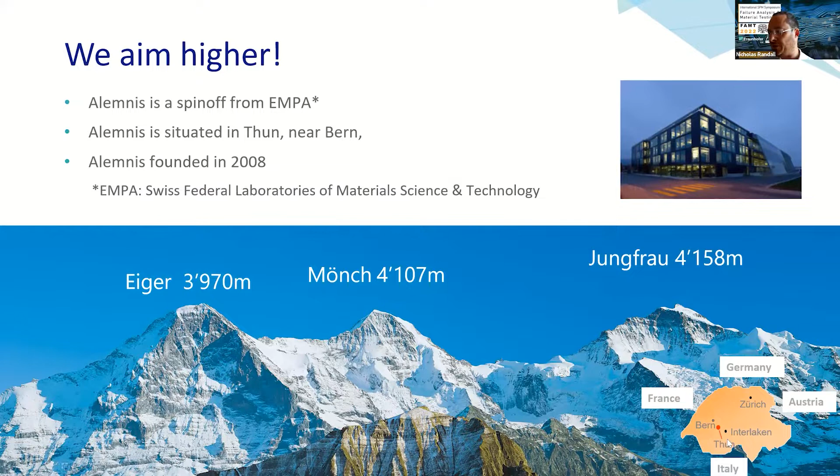Alemnis is originally a spin-off of EMPA in Thun, Switzerland. We're located just below Bern in Thun - this is the view from our office. This is a bit of the evolution of the company. We started around 2000 with the first in-situ mechanical tester that could be put into a scanning electron microscope, so that you can actually see what's happening when you're making a mechanical test.

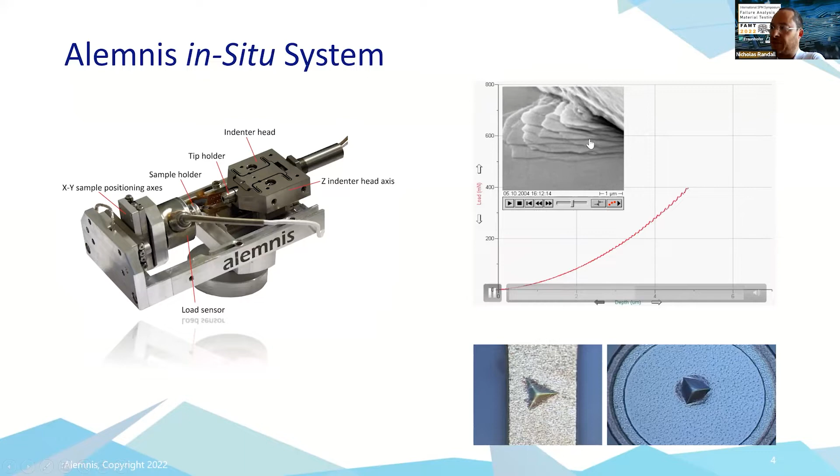So what is an in-situ test? You can see it here - this is an indentation into a bulk metallic glass. The load displacement curve doesn't necessarily tell us what's happening at the interface, whereas being able to see the test live with the SEM shows us that we actually have some slip planes here.

So the system itself is small. We have an indenter mounted on a displacement actuator here, and a sample mounted on the load cell. The sample is typically on a standard SEM stub, so it's very easy to mount - we either glue or clamp it.

This is used a lot already in typical nano indentation testing of, for example, bonding pads you can see here at the bottom, because we can locate a zone to a few nanometers precision. So we're very, very accurate in our repositioning accuracy.

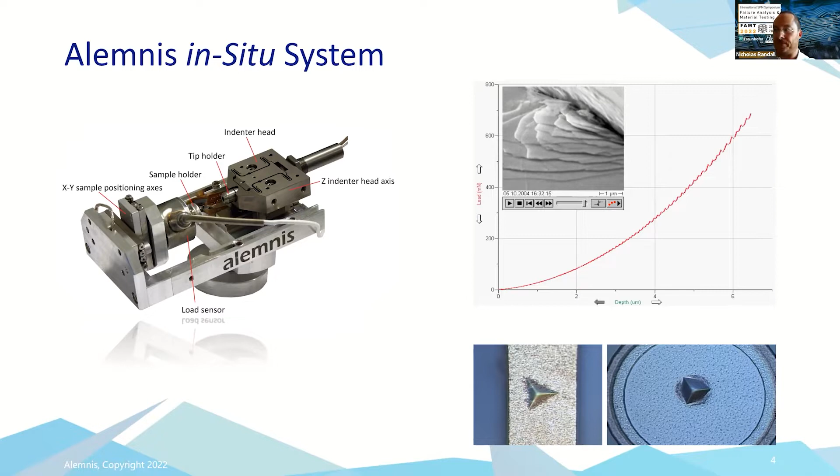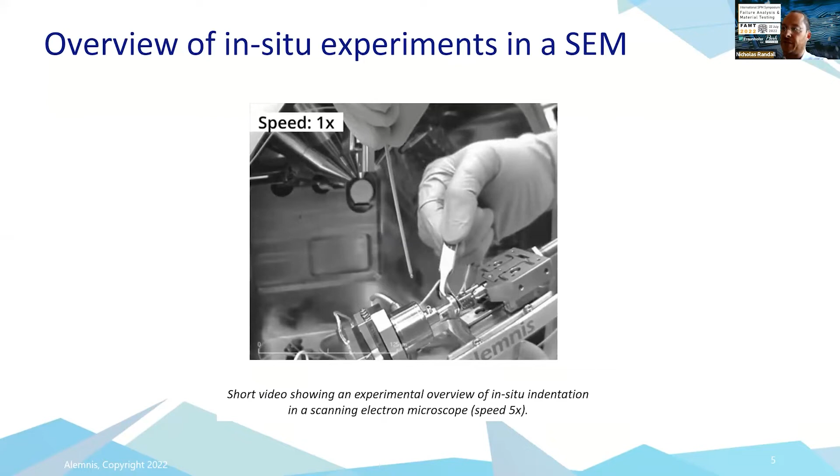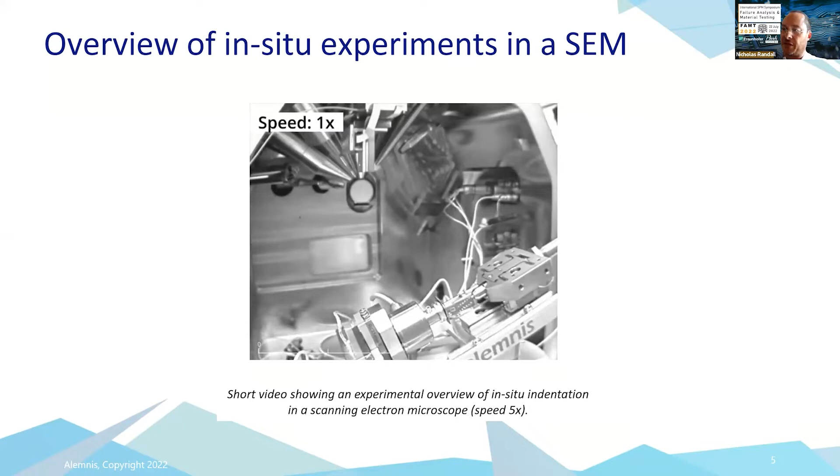Just to show you what this looks like: here's the Alemnis standard assembly mounted on the XY stage of an SEM. We're just mounting the indenter here, and then we're going to mount the sample, which is glued to an SEM stub, which you see now. Once we have sample and indenter in place, the whole assembly can then be moved under the pole piece of the SEM. Here we see just tightening of the grub screw, and then the whole assembly is moved inside the chamber. Then we shut the door, pump down a vacuum, and approach towards the pole piece.

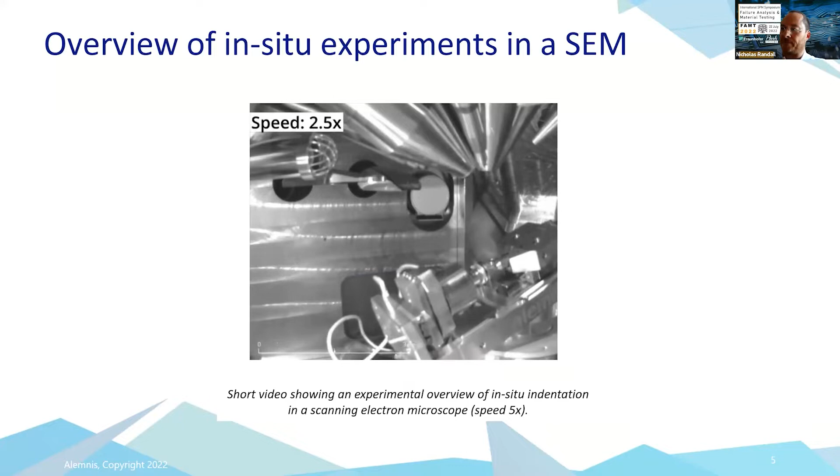Here we go. Once we're focused on the surface of the sample, we can then choose where we want to make a test. In this case, we're looking at a micropillar made by focused ion beam, a FIB'd pillar. We might want to do a single cycle stress-strain analysis to see when the pillar breaks - this is a silicon micropillar. Okay, there it goes, it breaks.

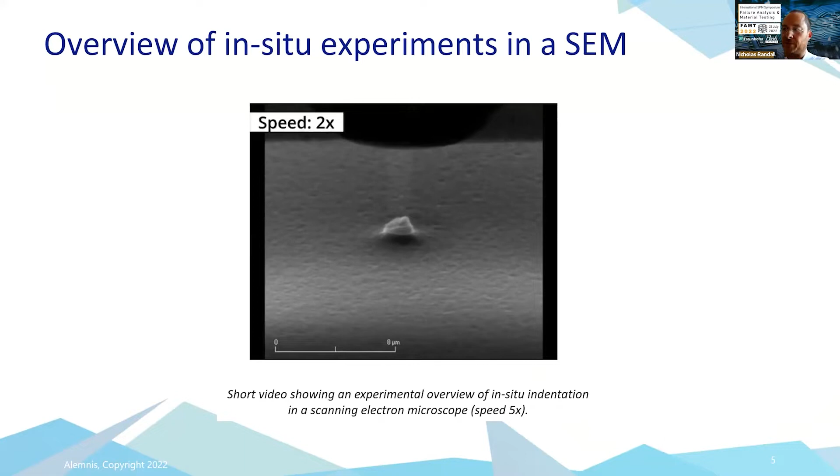Or we can program the system to do whatever we want. In this case, we're doing a fatigue test - we can do this low cycle, high cycle, we can choose the amplitude, etc. So you get an idea of how the system works.

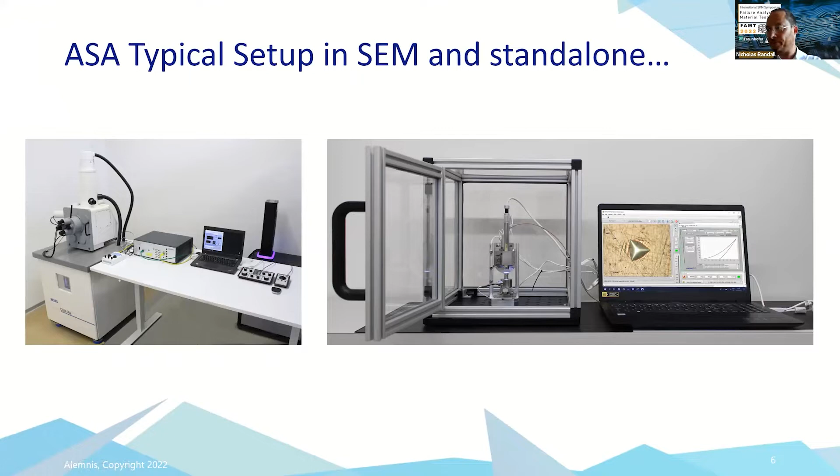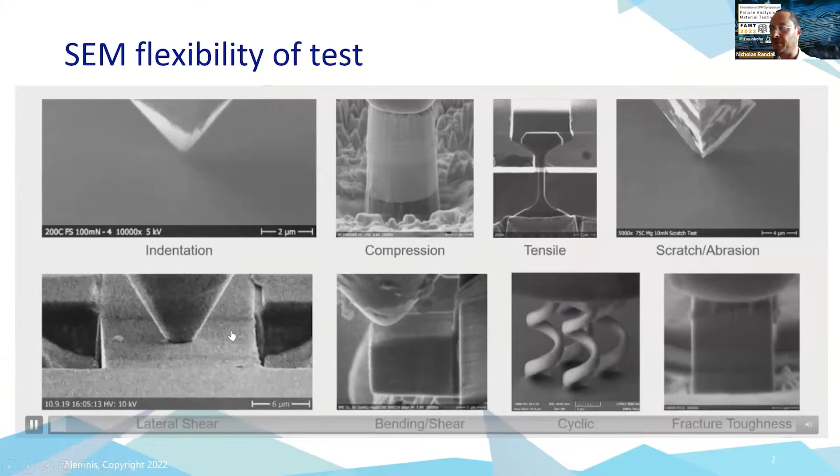One important point: different to most nano indenters, this system is a displacement-controlled machine, and this is very important for deforming large structures. You can see here, this is a 3D printed structure - if this was a load-controlled experiment, as soon as we start to crush, we're going to suddenly crush very fast and not get any data. So it's very important to have displacement control in order to have constant speed, and therefore capture the entire deformation history of the material.

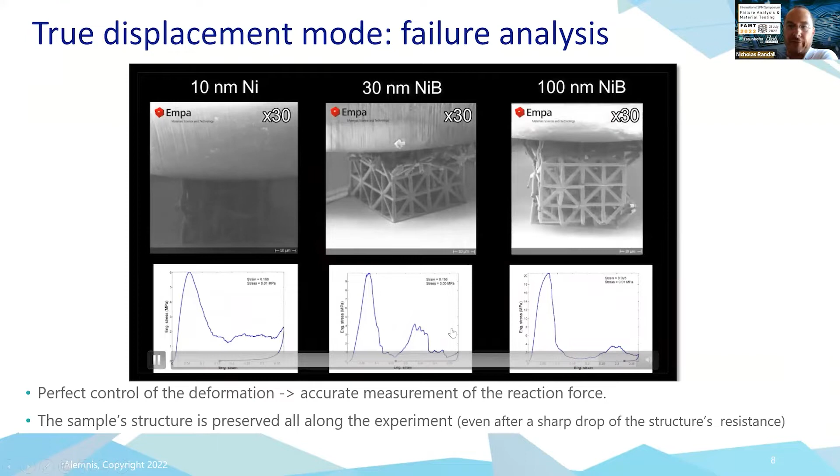So a quick overview of different speed testing, because this is quite unique. When we test at different speeds, we can look at the strain rate sensitivity of materials. At the moment, typically nanoindenters are testing in very slow regime speeds, typically 10 to the -1, -2. What's interesting is getting up to strain rates of 10 to the 4, 10 to the 5, which are very fast.

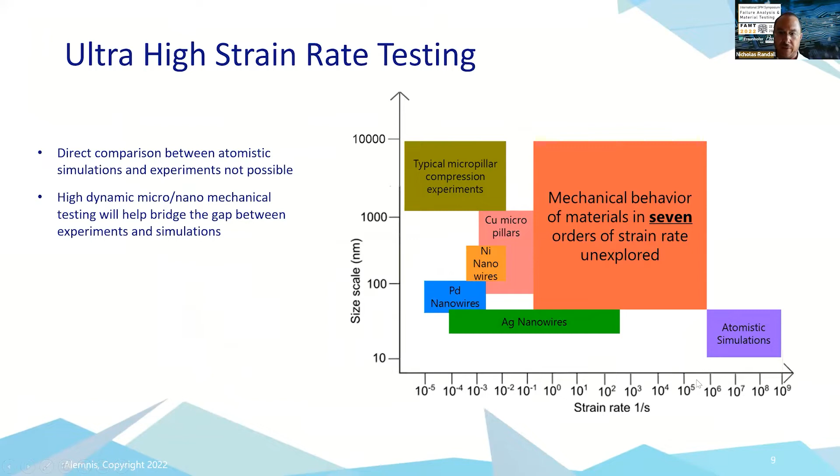We do that by being able to deform very quickly, typically using a piezo mounted here that can deform the indenter at up to 10 millimeters per second. And we do that on a very small pillar, which is a few microns. Therefore we can get up to strain rates of 10 to the 4, so 10,000 per second, which is the speed almost of a bullet hitting something. So it's ballistic, and this allows us to map strain rates over many orders of magnitude.

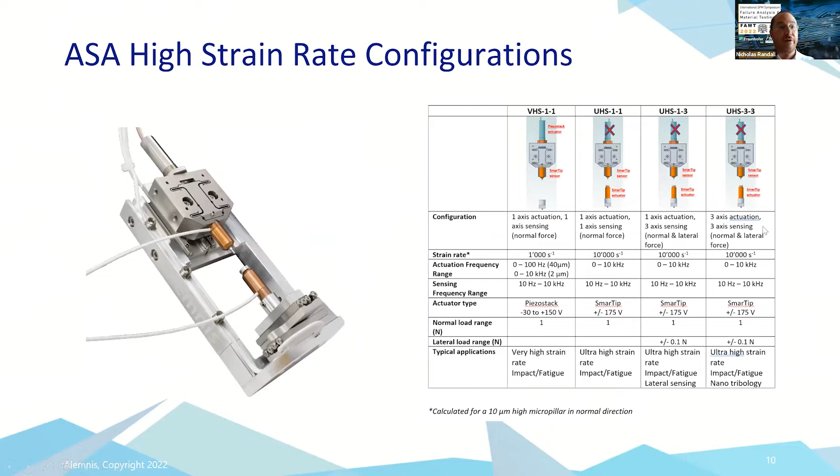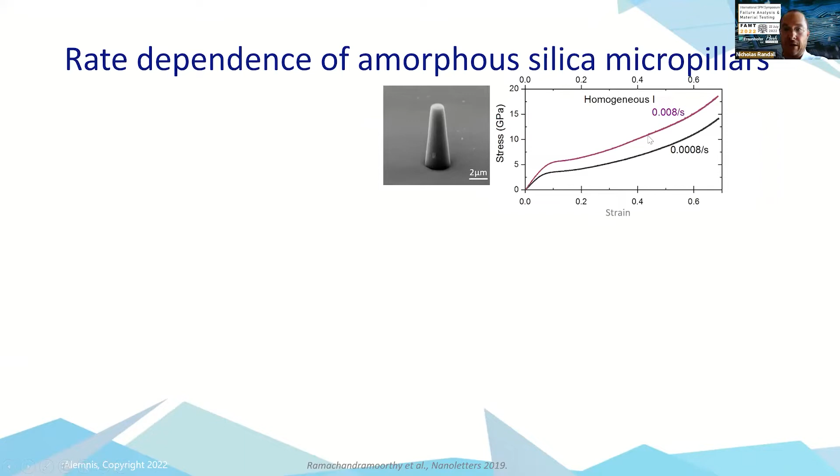Just to show you why that's useful, this is a fused silica pillar. If we deform this pillar very slowly, it's glass, we get a ductile result. At 0.0008 per second and 0.008 per second, we've got very ductile deformation, which is normal. If you deform glass very slowly, it deforms in a plastic way. If we go to the next order of magnitude, 0.07 per second, you can see now that we're failing the pillar and we've got some serration.

So we're actually seeing the ductile to brittle transition of the glass. If we go to the next order of magnitude, 0.7, now we're very brittle, and we see that in the data. We break more quickly, and there's very little ductility. If we go to the next order of magnitude, 6 per second, now we're still brittle. This is the most brittle state, and there's no ductility at all, pretty much.

So we might assume that if we go faster, we might become even more brittle, because if you hit a piece of glass with a hammer, it smashes, you don't get any ductility coming back. But at the small scale, we see that at 60 per second, we're still brittle, but we see some ductility coming back. So this is 60 per second, this is 850 per second, and this is 1,400 per second. So just on this slide, we've got 8 orders of magnitude of strain rate on the same material.

And that really is new today, being able to look at the strain rate sensitivity, especially in semiconductor materials that might be subjected to high strains in service.

So we can also couple that with environmental control. External to the SEM, we do liquid testing, we do humidity control. We can also do radioactive control and high and low temperature.

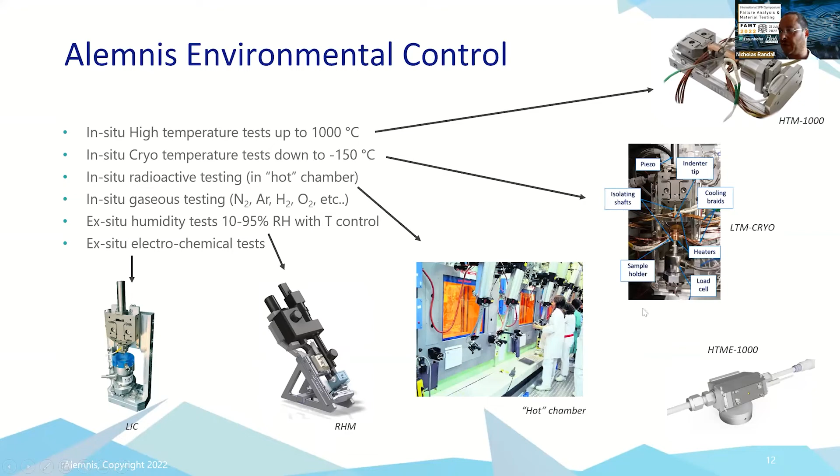So just to show you quickly a high temperature stage, here we're heating the sample and cooling it, and we're heating and cooling the indenter separately. We bring them together so that we have a stable thermal contact.

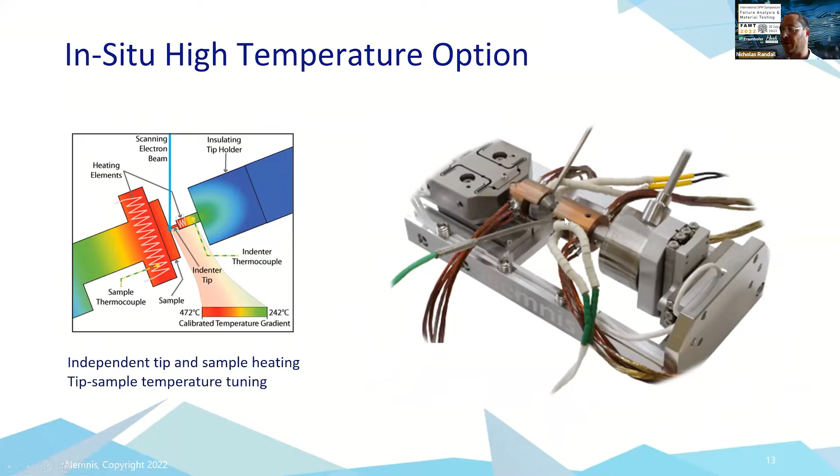And just an example from semiconductor, here we have silicon micropillars being tested at 500 degrees C. Now, we assume that silicon is a very brittle material, but when we deform it at high temperature, we see it's actually pretty soft and ductile. You can see it's a very slow test, 0.001 per second.

These are all done with different strain rate jumps. So here we're still testing because it's a very slow test. Let's go to the next one, 0.01. You can see here, ductile deformation of the silicon pillar. You can see necking occurring, but we don't actually fail the silicon. We just deform it in a ductile way.

So let's let that one run, go to the next one. 0.1, this is the ductile to brittle transition speed. We see that very clearly. And then as we go faster, we've got 1 per second, we've got 10 per second. Now we're very brittle. We're just seeing the before and after because we're moving very, very fast. So you can see that silicon has very different properties depending on the speed of deformation.

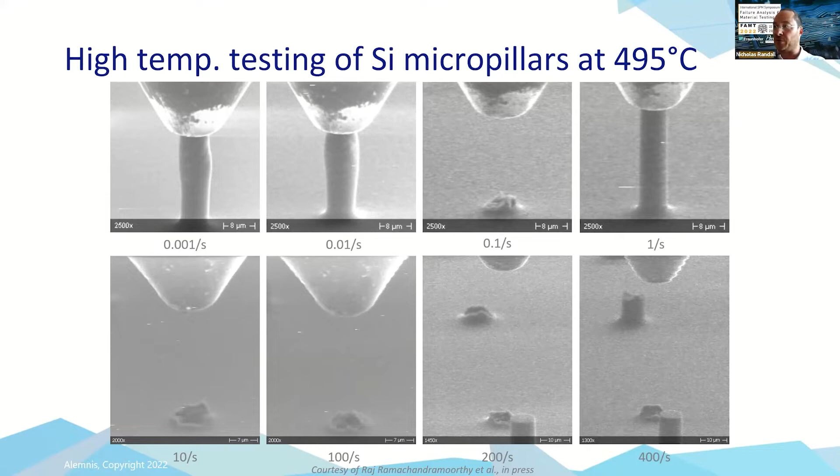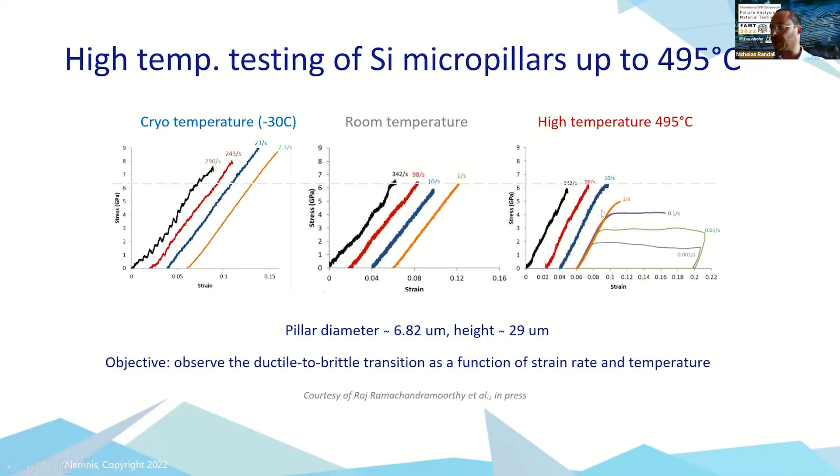And of course, that's very linked to the temperature of operation as well. Here you can just see a summary of that. So on these silicon pillars, we did testing from cryo temperatures, so very low, -30, up to 500. And you see this ductile to brittle transition very nicely on the stress strain curve.

Another way we can use the system is for rapid impact. So for shock testing, here we've actually got tests on a coating up to 100,000 hits with a flat punch, and at 2 temperatures, room temperature and 500. So we can see how the material reacts to repeated impact on the surface.

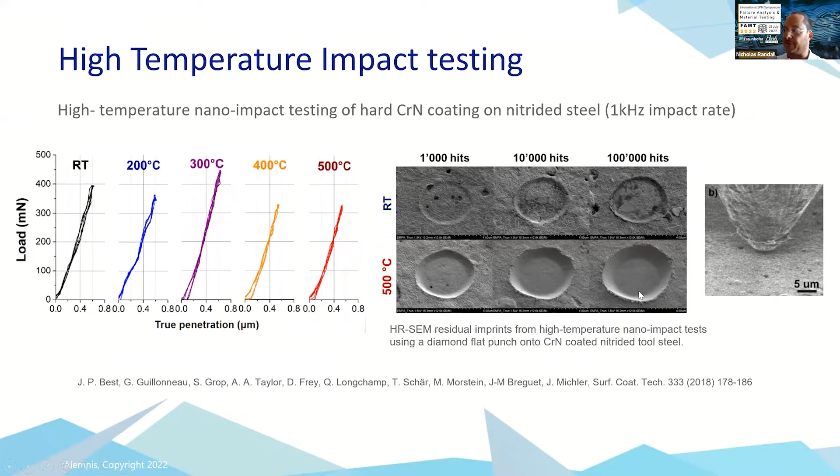This is how we do cryo, so low temperature. We're actually cooling the system by pumping liquid nitrogen into the SEM chamber. And here we've got a fused silica pillar being tested with a multi-cycle at minus 120 degrees C.

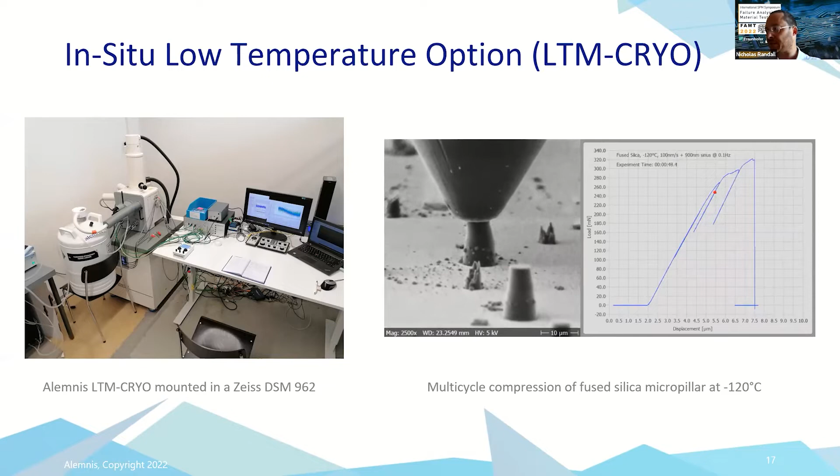Another recent innovation is high-speed mapping, the ability to make large arrays of nanoindentations over a defined surface and actually see what's going on. We can do that because we have very fast electronics for the strain rate. You can see a typical fast map being performed here with a Berkovich indenter.

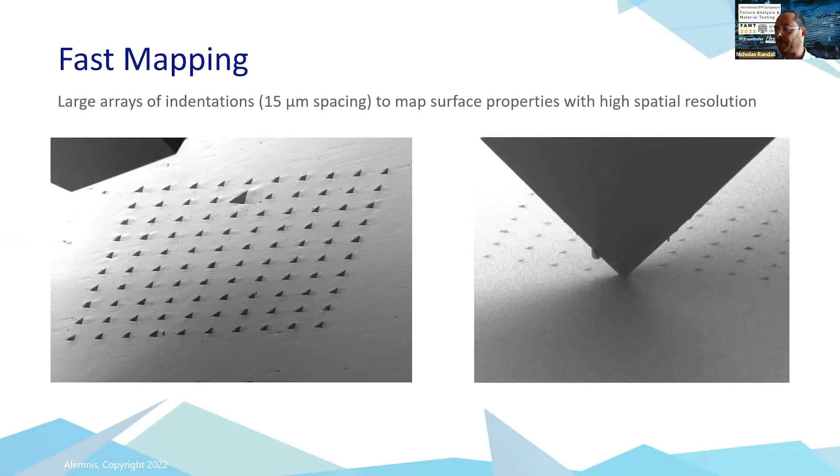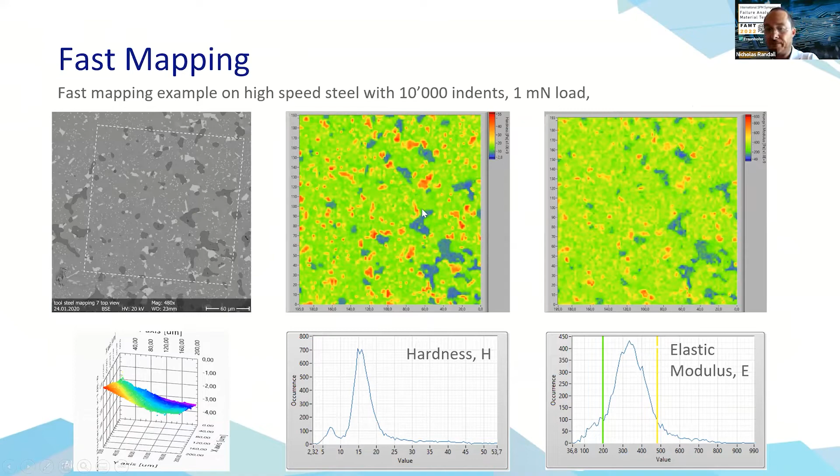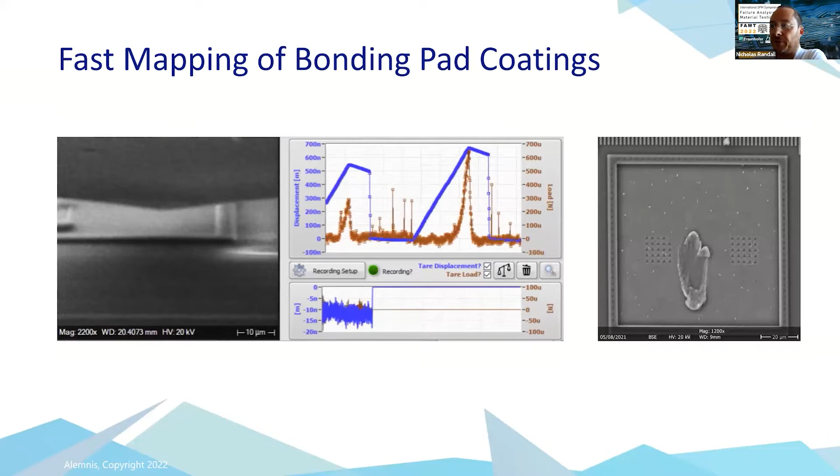In the case of semiconductor, we're often interested in making fast maps to check coating properties. This is a bonding pad coating, and we're doing small, fast arrays of maps in different areas on the bonding pad to understand the integrity of the aluminium coating deposited on the pad. Of course, we've got to be very localized because we don't want to test where there's a scrub mark.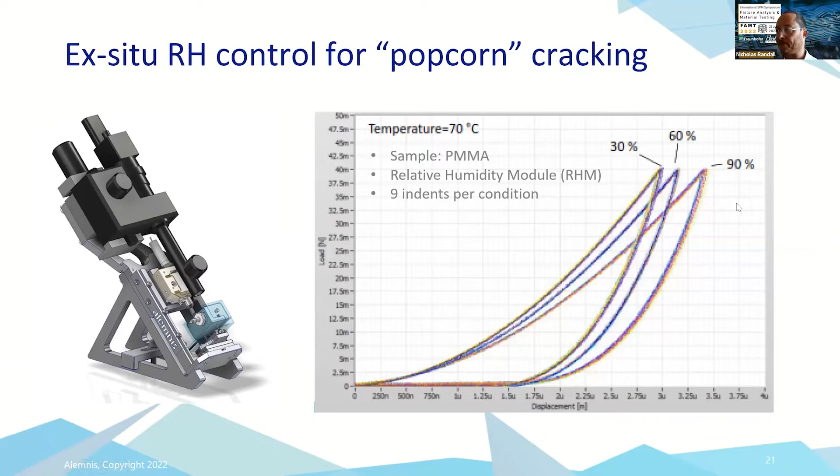We can also put the system in a modified frame for beamlines, so we can do tests in synchrotron beamlines or in tomography units. We feel this is a way forward where we could test mechanical properties and measure the 3D tomographic image. This is a system placed in an RX Solutions CT scanner.

This is a polymer foam. We're compressing it from above, and while we compress it, we're rotating and building the 360-degree image of that foam structure. This could also be very interesting for looking at semicon packaging.

This is another example of tomography - compressing a particle to a predefined strain, a deformation of 100 microns, and then doing a 360 scan to look at the cracking inside. This could also be a useful technique.

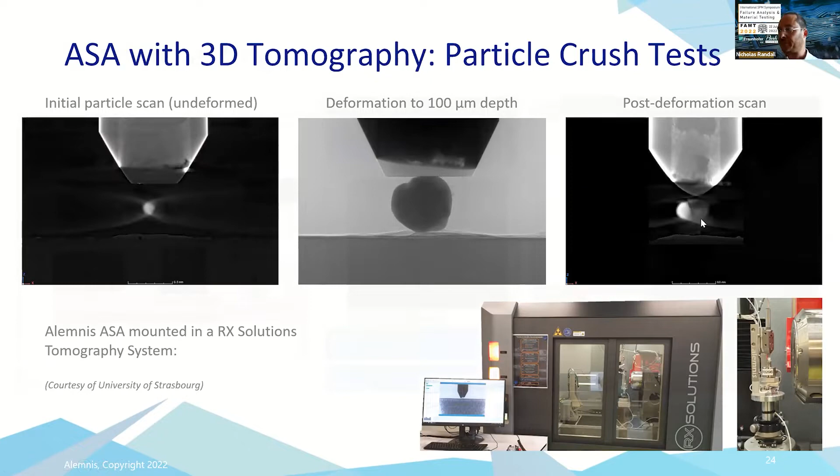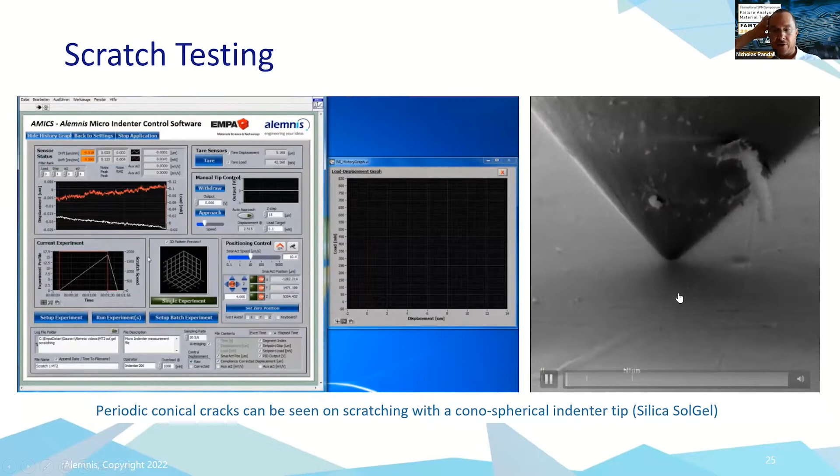Moving on to some other techniques: scratch testing is commonly used for looking at coating integrity. It's been mentioned briefly before, and it's nice to be able to see the scratch in real time. You can see the tensile cracks here being formed, and when the load is removed at the end, you can see the viscoelastic recovery of the material. It's a very nice way to understand not only scratch resistance but also viscoelastic properties, surface scratch resistance, and it can also be used in progressive load for looking at scratch adhesion to the substrate.

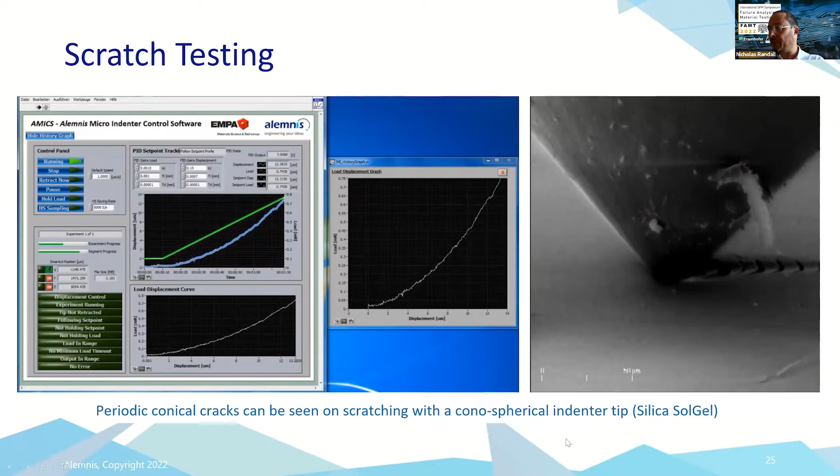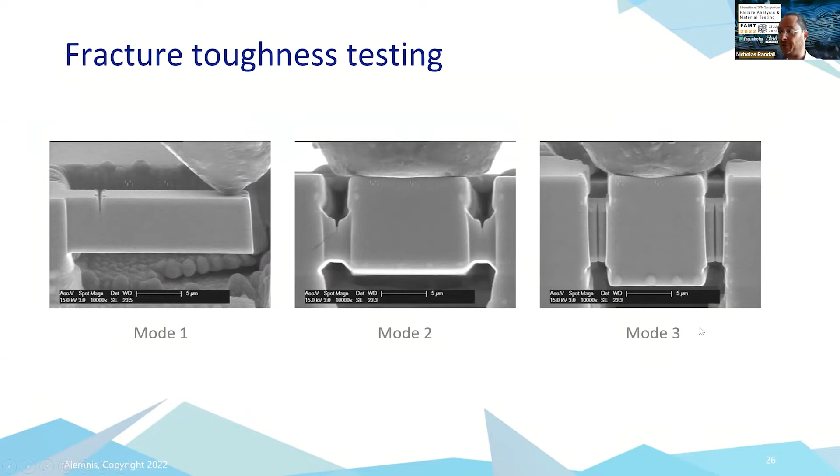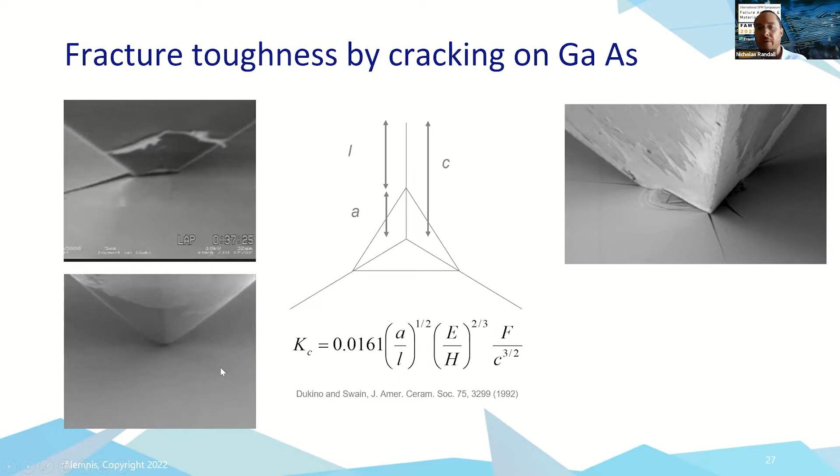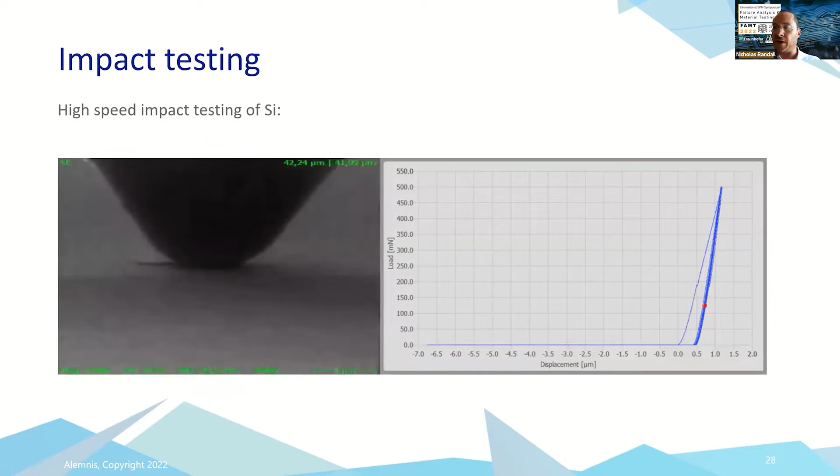This is an example of using impact for shock testing. This is an accelerometer, a capacitive accelerometer. We're basically simulating the suspended accelerometer part hitting the stoppers, repeatedly hitting the stopper and seeing how many cycles it takes to fail that material.

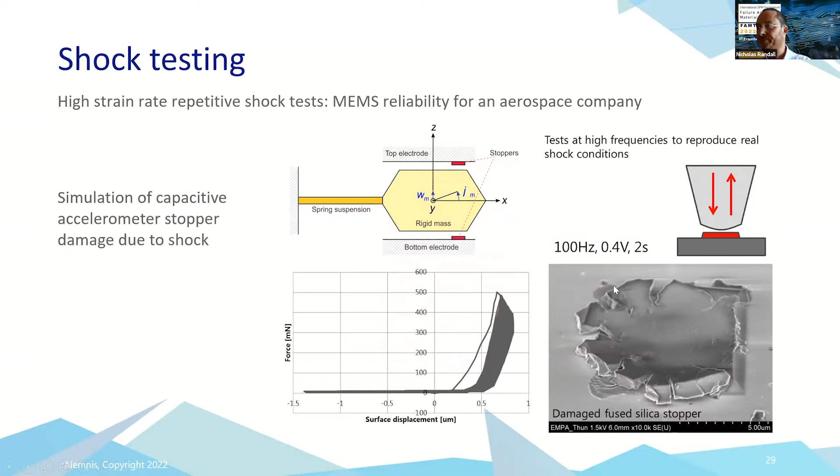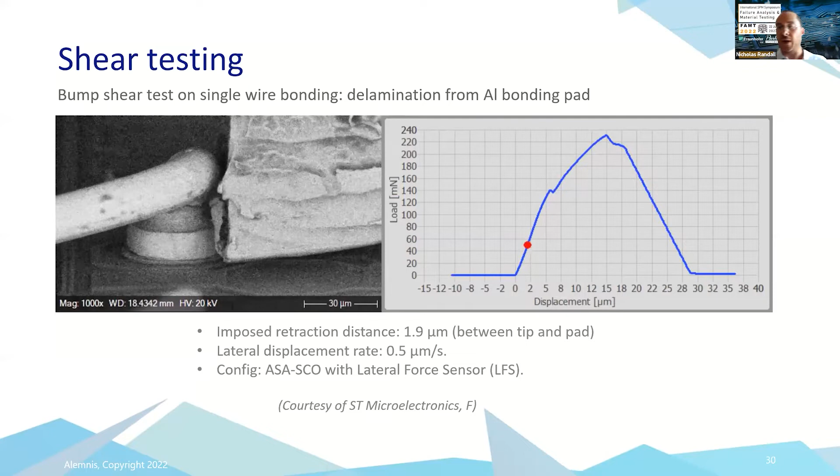This is a bump shear test. We're using the lateral force measurement of the system to rip off a single wire bond, using a special truncated indenter. It's very nice to see this in real time because we can see how the bond is failing and where exactly at the interface. We can also couple that with electrical testing at the same time.

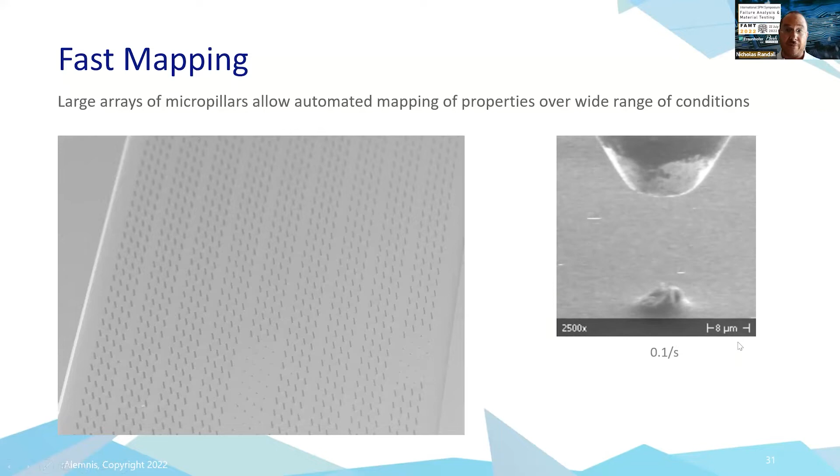One thing that's useful is combining the mapping advantage with arrays of pillars. We're able to make arrays of pillars, especially in semiconductor materials, using lithography. If we did them by focused ion beam, it would take days and days, but we can make an entire wafer of pillars in hours using lithography. This means we can program the machine to test every pillar with different parameters, quickly and in an automated way, to get a lot of data for our models.

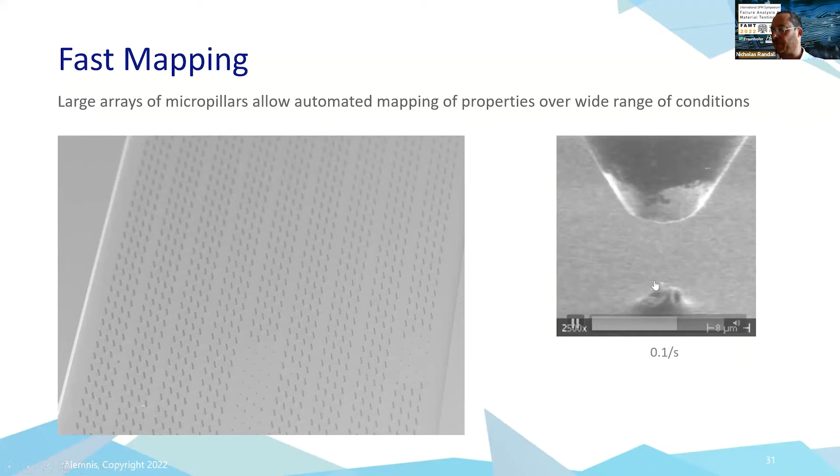So this is an array of silicon pillars. You can see one being failed on the right here. And here you can see an automated test where we're basically going to every pillar and testing each with slightly different parameters.

So you could have some pillars, for example, on different areas of your wafer around devices. And as a quality control tool, you could be testing those pillars just to be sure that the material or the coating hasn't changed in properties and you don't have a production issue.

This is also an automated platform development to be able to fast map different areas of a 4-inch wafer, which could have a whole range of devices on it. You could choose areas under the microscope and then go under the indenter head and in an automated way map different areas, different bonding pads, different devices, different packages even. That's something we're currently developing.

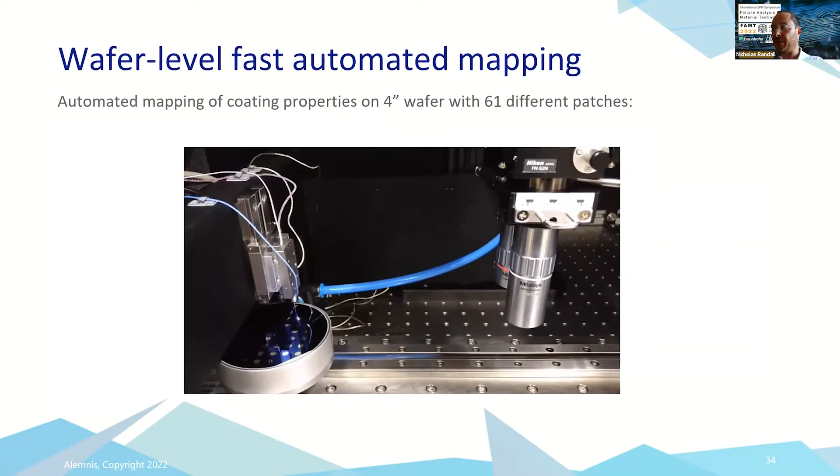One application is these capacitive accelerometers, still at the wafer level. We can drive around and choose certain devices, there's thousands on this wafer, and do a beam bend test, as you can see here. We're basically increasing the load until this beam breaks. You can see the load increase and the failure. So this is using this as a fast automated quality control tool.

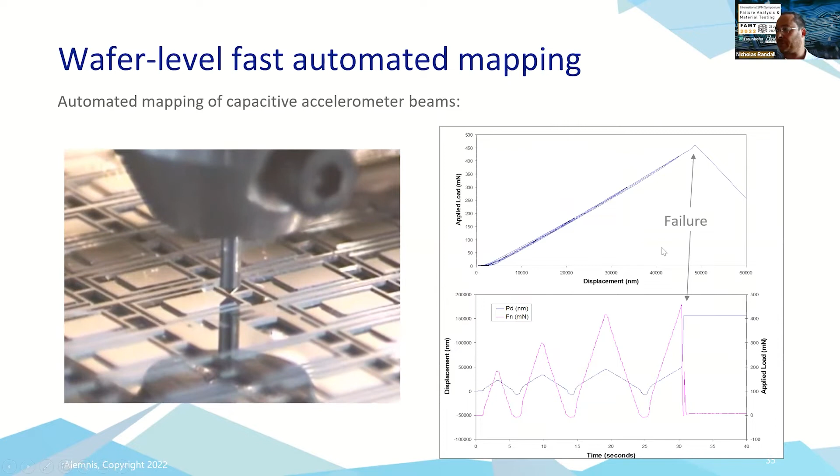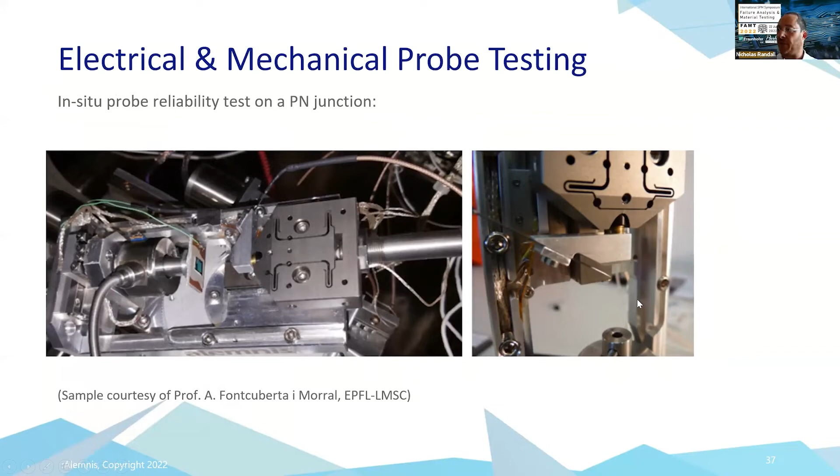We can also map through sections of bonds, looking at the coating and the bond wire, and different areas of the bond wire. This is simulating the actual probe testing by actually mounting a probe on the Alemnis system and then being able to apply that probe.

For example, here we're doing it on PN junctions and we're functionalizing the indent, the probe tip, with a closed circuit. So we can also look at the electrical properties and the load at which connection is made.

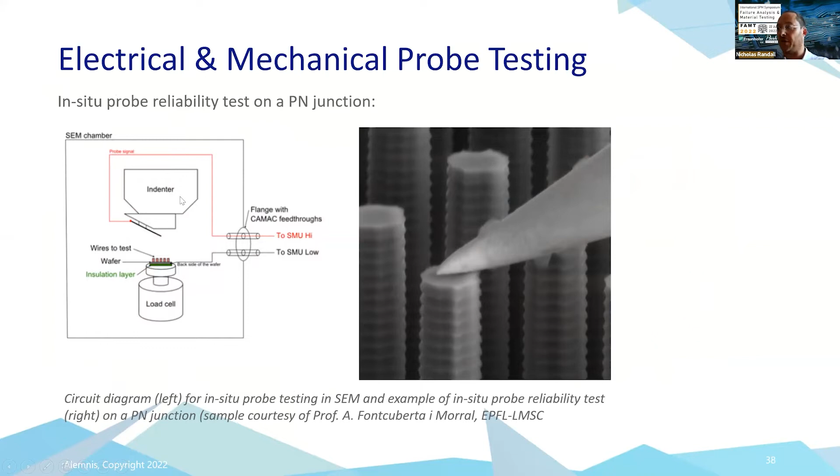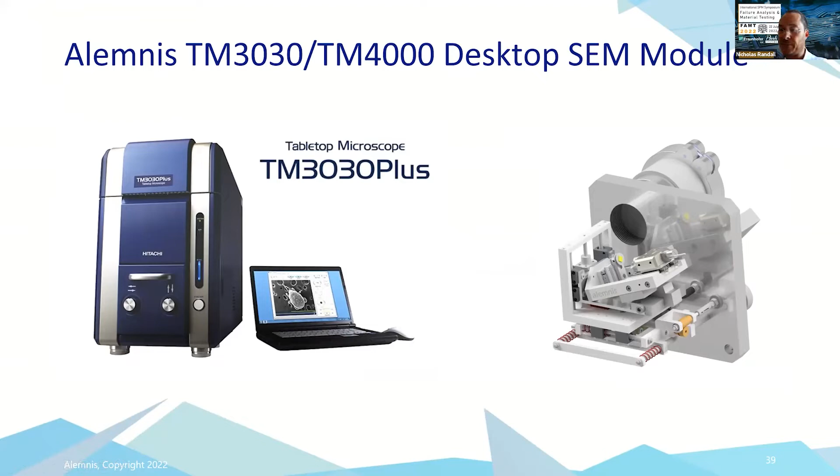So just a couple of final slides. The other thing we have developed recently is a smaller version of the Alemnis system that fits into the Hitachi desktop SEM. This may be of interest in some fabs.

We also have coupled our nano-indenter module with an AFM. We heard earlier in Silke's talk about the use of AFM in situ in an SEM. Well, with this system, you can not only look at the zone of the SEM, you can image it with the AFM, and you can make nano-indentations in specific zones of your choice.

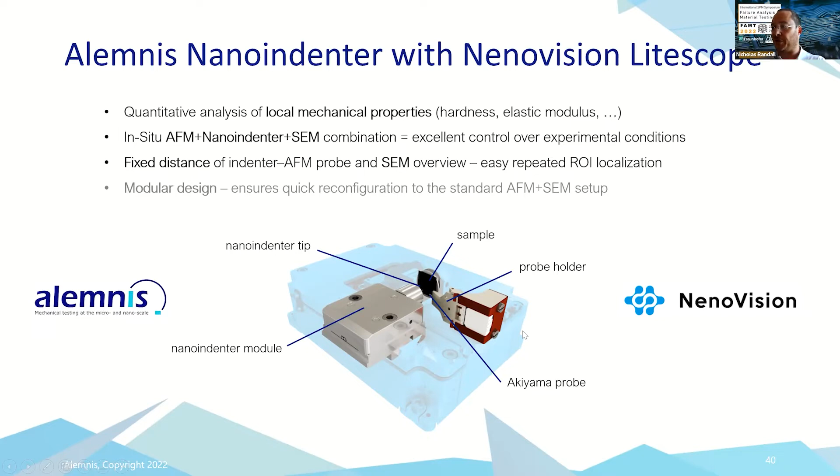So you can see here an example. This is a high-speed steel microstructure. You can see the backscatter images, the AFM image of the surface, and then we've made some indents in specific grains. So we're really moving towards correlative microscopy techniques where we combine mechanical properties, AFM topography, SEM, EDX, and try to combine all these in the same area with the same spatial resolution.

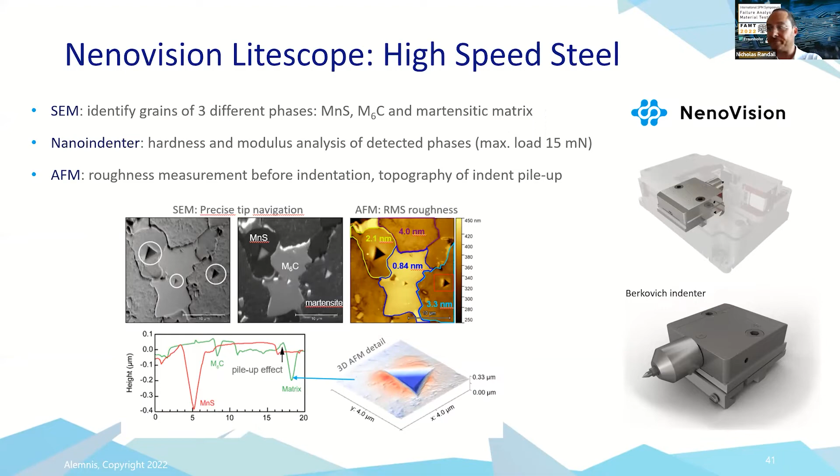Just a few conclusions. At Alemnis, we continue to push the boundaries of small scale testing. Strain rate control, I think, is very unique, as is the temperature control, high temperature and low temperature, and also being able to do very, very fast mapping. Currently, we're up to about 10 indents per second.

So the question then is, we have the instrumentation to go very fast, but does the test at that speed really make sense? If we want purely mechanical properties, then maybe 10 indents per second is a bit too fast. But if we just want to compare a surface and map it, then it can be quite useful because we get a lot of data points very quickly.

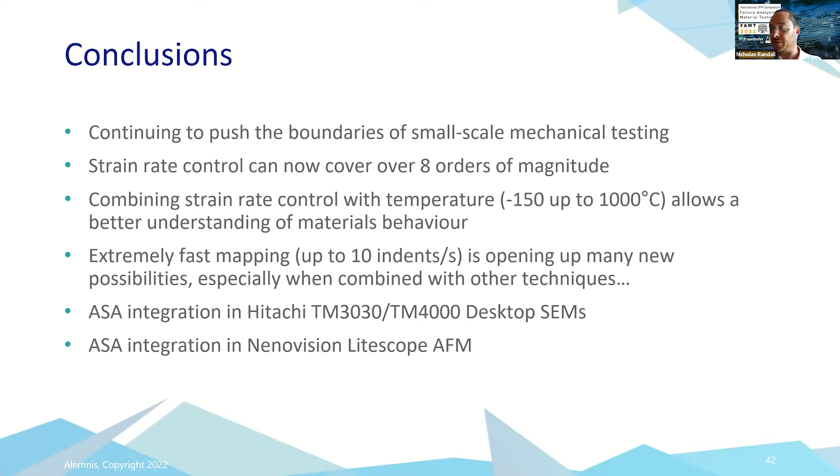And of course, integration in desktop SEM and the combination with AFM. So thanks very much. And if there's any questions, please don't hesitate to get in touch.

There's my email address. Yeah, thank you very much, Nick, for this very visually appealing presentation. It's very nice to see these live videos, and visually it's very aesthetic. So we have time for some questions, and then we'll go into the discussion panel as well, where we can have some more. So does anybody have any questions on Nick's talk?

Otherwise, I have a couple to start with, because I could see, obviously we do a lot of mechanical testing in AFM as well, but it's at a different scale. I was trying to look at the scale bars for the end radius of some of the probes you had, that look like between 5 and 10 microns. So maybe you can talk about the probes you have. Are these commercially available probes? Do you make them yourselves? What are the typical size ranges you have?

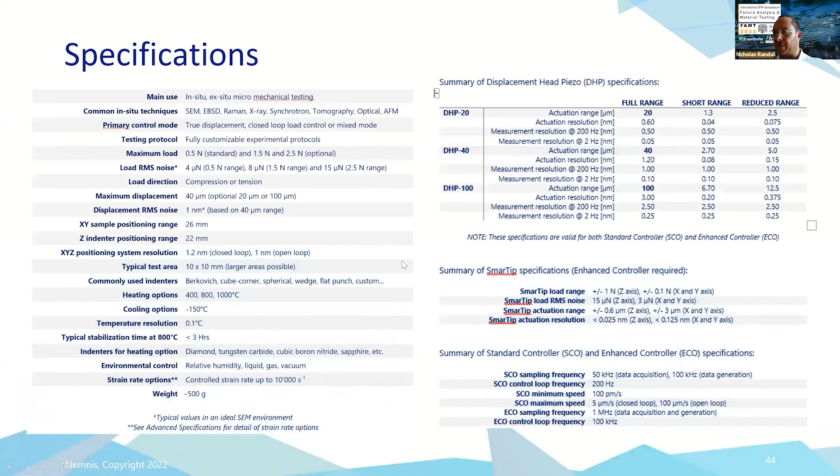Well, standard indentation, if I just go back to an indentation test. So for nano indentation, we're using a Berkovich, which is a 3-sided pyramid, as you see here. This has an angle of 137 degrees, and the best tip radius you get on a Berkovich is about 10 to 20 nanometers. So even this pyramid has a radius at the apex. So it's not the same as an AFM tip. You're never going to get the same resolution. But we need a tip area with a defined geometry so that we can calculate the contact area and therefore get mechanical properties like hardness or modulus. So it's a compromise.

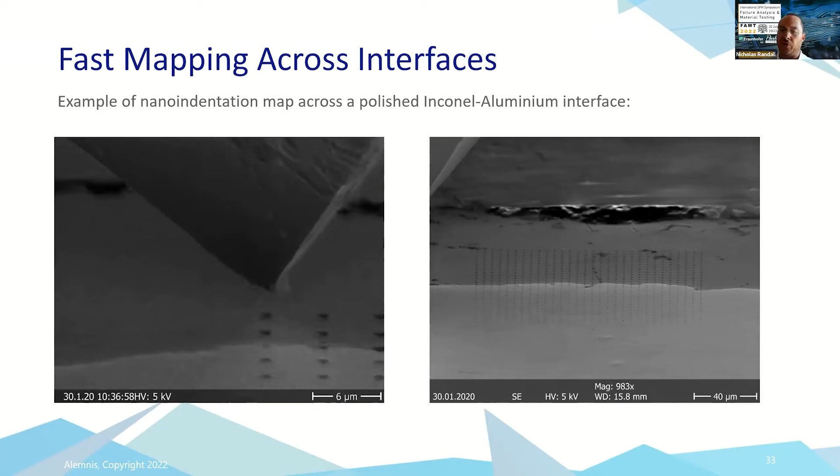Okay. And some of the other push tests, the cycling test, you're not using the pyramidal face, you're using a different type of... Yeah, so for pillar compression, we'd be using a flat punch. And the whole point of the flat punch is that on the end of this is a flat punch, so that we don't have to worry about the contact area changing. It's always the same. We basically have a flat on flat contact, so we have a fixed contact area, and so we can take that error out of the equation for stress strain. But we can basically make any shape indenter in a wide range of materials. We can make the indenters conducting, non-conducting, doped. And that's why we also developed the combination of AFM, so that we'd have the advantage of AFM imaging with the mechanical properties dedicated test. Because with AFM, of course, you can measure mechanical properties, but it's difficult to know the exact tip area shape in order to get the mechanical property in a quantitative way.

Okay. And I have one other question. If I'm not mistaken, you said the displacement that you're doing in Z here is done by piezos. What is the range of displacement that you can have? So we have three ranges, 20, 40, and 100 microns. You've got to have a fairly big range, because if you're testing soft materials, then for a few millinewtons of load, you might be moving tens of microns, for example, in polymers. So you need to have a fairly wide displacement range.

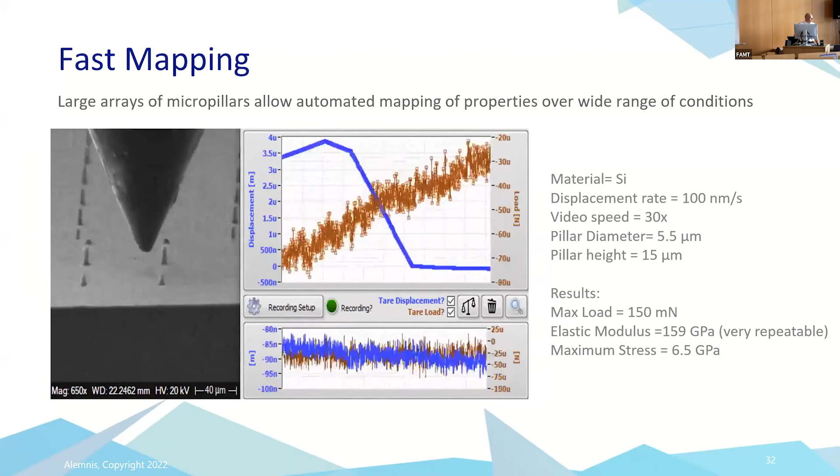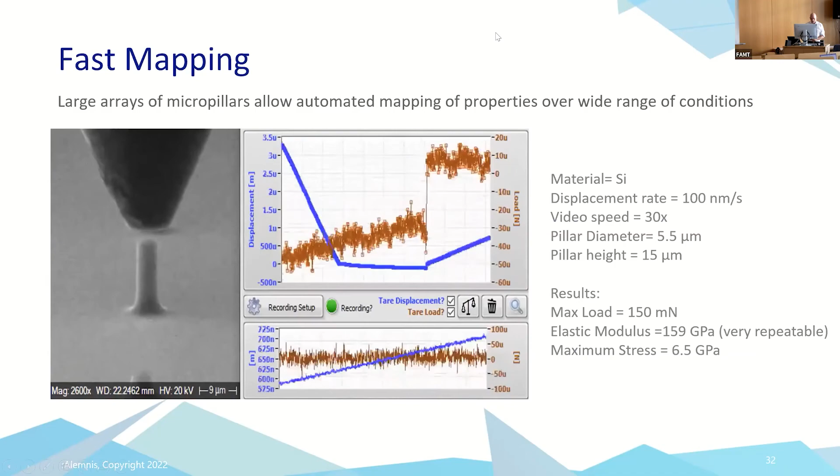Okay, so it's already 11:50, which is the time for our discussion panel. So that way, if there are any other further questions for Nick, we can ask obviously during this time. But for any of the previous talks, even from this morning, we'll be happy to try to answer any questions people have. I know that there was a question from Sika Lee. If you're still available to ask your question, please feel free to do that. Hi, can you hear me? Yes. Oh, okay. My question is for Alexander just now regarding the KPFM.

I would like to know for the KPFM results for graphene, you showed the results for air and in vacuum. How about if it's measured in a glove box? Would there be a difference? How different is it? Because I know you mentioned that's the concern with water.

Yeah, hi, good question. We haven't done any measurements on these kinds of samples in a glove box. However, we can flood our high vac chamber with different inert gases, for example argon or nitrogen, and also influence the humidity level in that regard. However, the water layer on most samples is quite resilient, and just by simply flooding the system with inert gas, it's kind of hard to remove all the water content.

So we usually even sometimes apply an annealing stage or step within the vacuum to really remove all the water. So I can't really give a more precise comment than that.